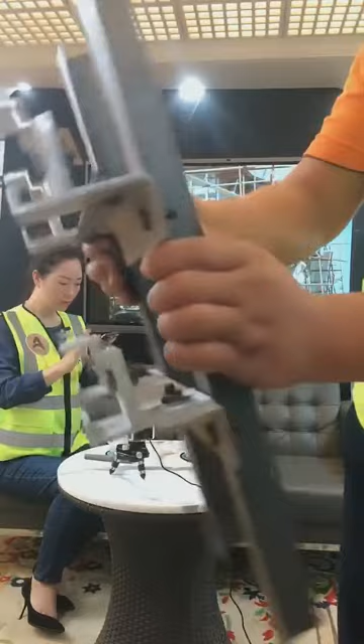Now in China, more and more buildings use the mechanical frame to do the stonework. I think each country has different regulations, but in China, for all the stonework on the facade, I don't think they're using any glue anymore. And even with all kinds of different glue - they call it very strong stone glue - still it's not safe.

For interior it's probably okay, not so high - because of the height of each floor, in the bathroom, or with porcelain, because porcelain is very thin and light. But for stone it's usually heavy, especially for this house, this palace. Better we continue with this palace - okay, please, next step.

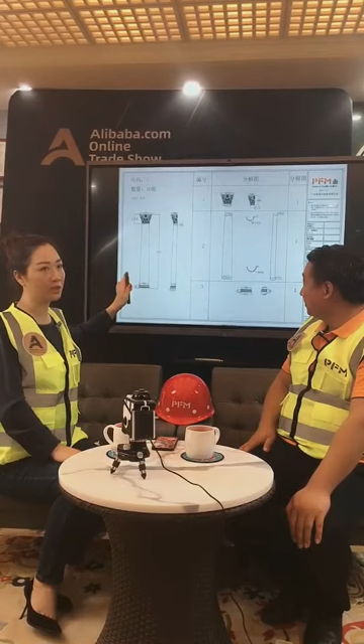Oh sorry, it's here. The next step, like what we said before, is it's not easy - if you have a wall, you have a design, but in production you need to separate each piece, right? We are explaining the two big columns, how it's being done. The height of the column is 4 meters - one piece, wow, that's a big one, that requires a lot of material. But I think they're separated, they need to be separated into two or three pieces.

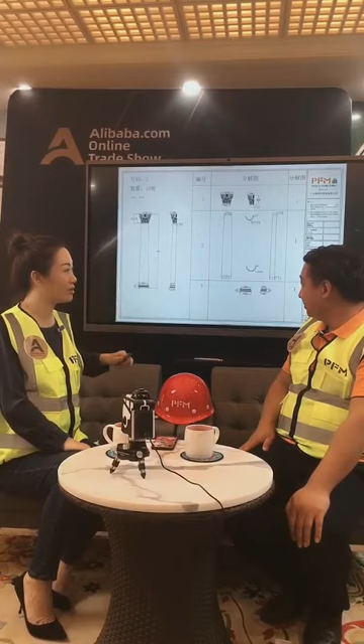Okay, that's overall height, that's the capital size. That's the hollowed one, from there you can see. Oh, okay, no light. From here you can see there is a base column, capital column, and a body column.

This is our engineering drawing just for this column, and this drawing is for our factory to produce this - for production. As well, this is for installation, but also we will mark, sometimes we have to mark each column, so on the job site they find the location of this column.

To clamp the stone. Another point - this system is safe for the earthquake. Yes, of course, because it's a steel structure, when the earth moved, it will be safe. Yes, it's a good point.

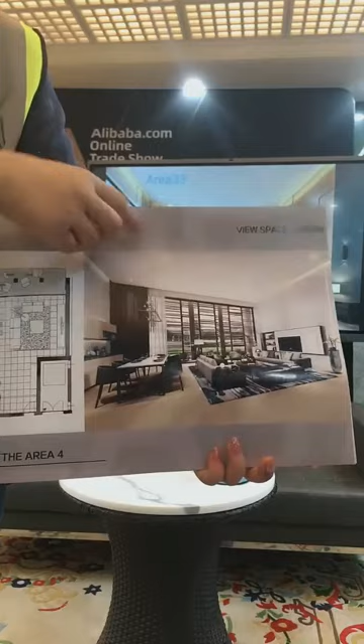And here's the detail of the TV wall. Here is another detail of another wall. Yes, another room, another bedroom.

This is a small detail of the wall design. There is wood, there is stainless steel. It's a very modern design. This is the idea of the house, modern design. This is a bedroom.

This is the bedroom, and there is a very special glass, and also a modern lighting chandelier. The wall is using a very special seaweed mud, and also a special healthy painting. Okay, here's the marble, marble on the wall. Hidden lights are popular.

Here's the character of the wall. You don't see it very clearly, but it looks like a galaxy. And there's decorations. Come closer. Here is a decoration, a feature of the painting. It looks like a galaxy, going around.

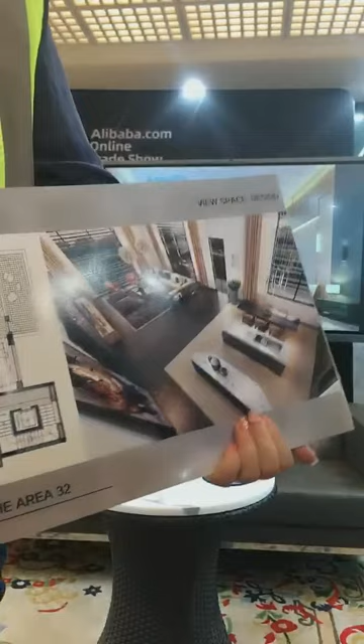This is another one. This is a kitchen and a living room. There is a dry area and a wet area. Here's a wet area, and we used a porcelain floor. Here is the dry area, we use a wood parquet floor. Very nice.

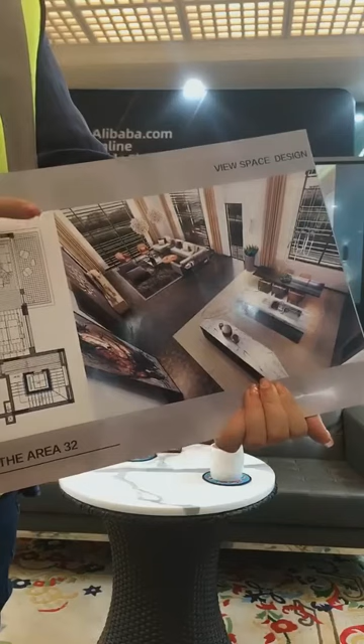Because you could imagine here you will wash the dishes, you will have tea here, the water could come to the floor, and long time after this will be damaged, right? So we use parquet in the sitting area, but only in this area. This is not a heavy kitchen, this is a Western kitchen, we call it only a light kitchen. Light kitchen means that you have tea here, you wash some teacups here, simple things. In this palace, there's a very heavy kitchen in the basement, in the parking, next to the parking.

Okay, so this floor is finished. This is some bedroom, and this is another bedroom. This is a very special wall design.

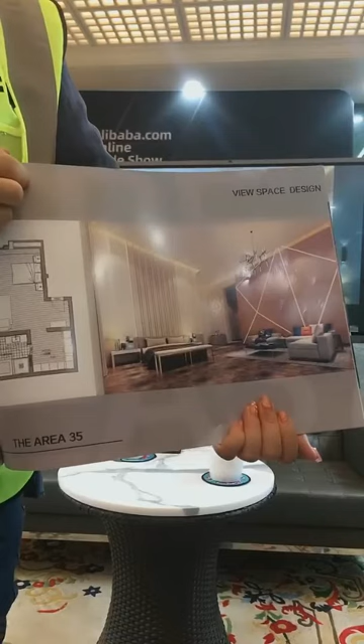The wall is 3D, it's coming a little bit away from the wall, there is some distance, so this is a high point. This is LED light. It's a nice design and very hard for construction, but we did it. We have very good carpentry.

We'll show some photos. This is also as well. This is a very high wall. The madame of this house likes a Chanel design, French, very simple Chanel or Dior design, but still in a modern look. So we came to this design. There is some hidden light here.

Now this is the details of this wall. We're gonna show you some photos. I was at the job site. Okay, that's the idea.

We will not show you everything anymore, but we offered this design to our customer, and they were very happy with it. And then we gave a budget, which I think was a very good price for them, and we took the job.

It started in 2018, I think, in August or October. With our workers, they went to the site and started the whole job. By now we have finished only the guest house area. So let's look.

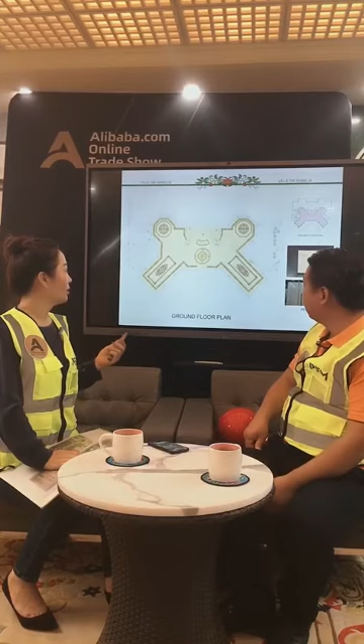Okay, so this is our interior design - it's clearer now. This is our designer. We did a floor plan for them with the medallions. It's 2D, not 3D. Then on the left you see the location.

It belongs to the ground floor. The material you chose is cream marfil - yes, a little bit over there, you see it. Then you see a small sample, and you see a big slab showing how it looks.

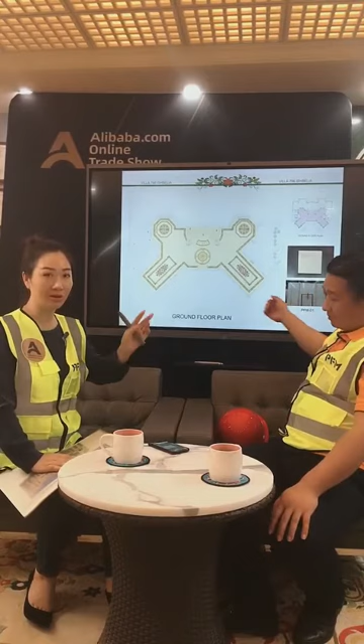The design is exactly book-matched, left and right. I think this is the majlis - maybe a men's majlis and a ladies' majlis. On the ground floor, it's usually arranged like this.

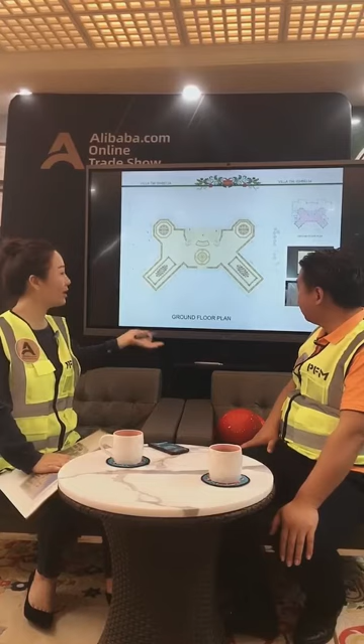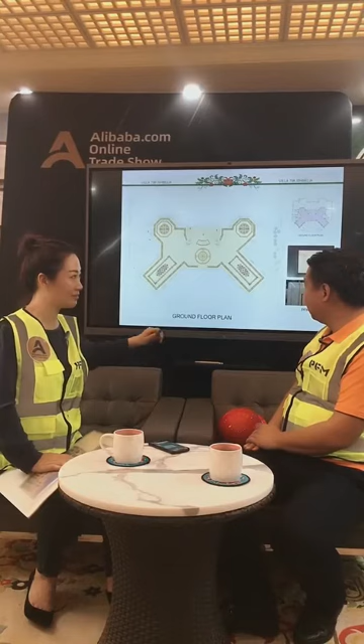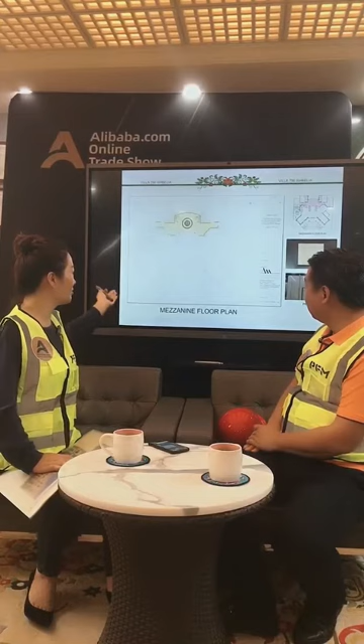And then you come to the middle floor - the Mezzanine floor. In the Middle East, they call it the M floor. So here you can see how we're going to arrange it, though it's not very clear here, so let's move quickly.

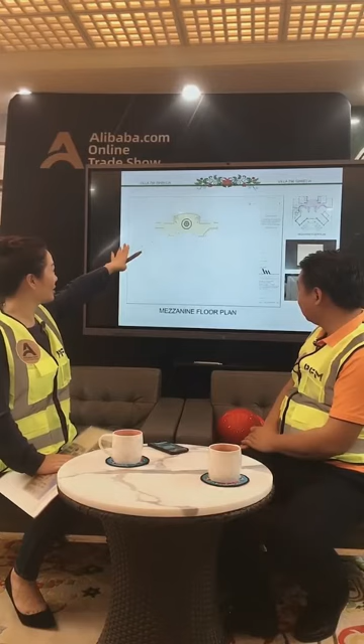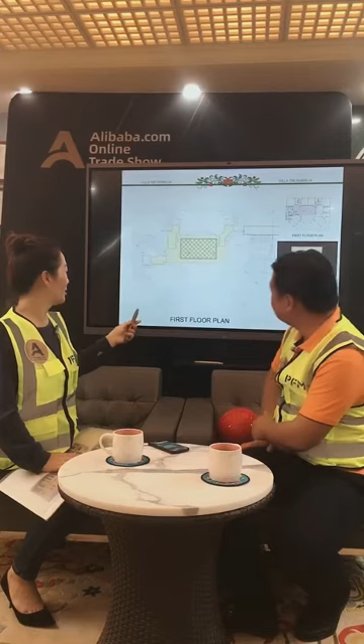And then this is our first floor. There's a problem - I know when the camera points to the TV screen, it's usually not clear, but I do have a printed one. Let me show you.

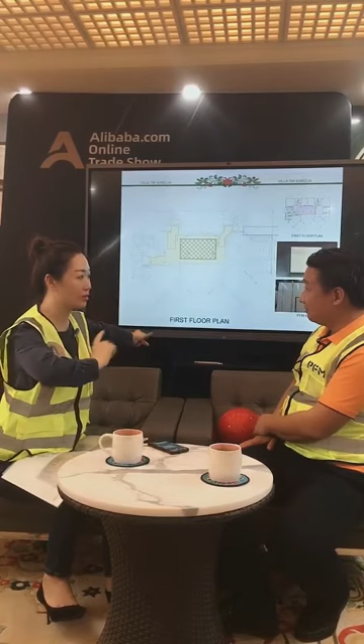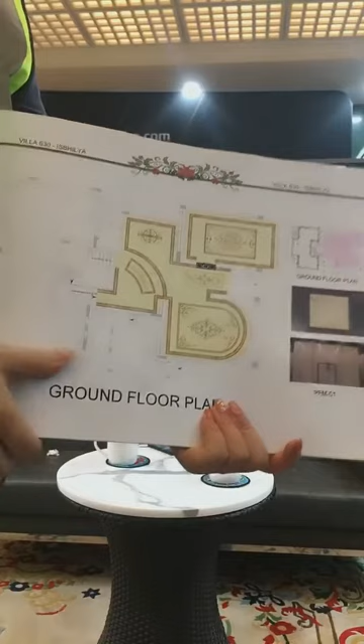Okay, see? Here's a printed one. It says location, ground floor plan. This is the area we worked with - this is the master ground floor plan done with AutoCAD.

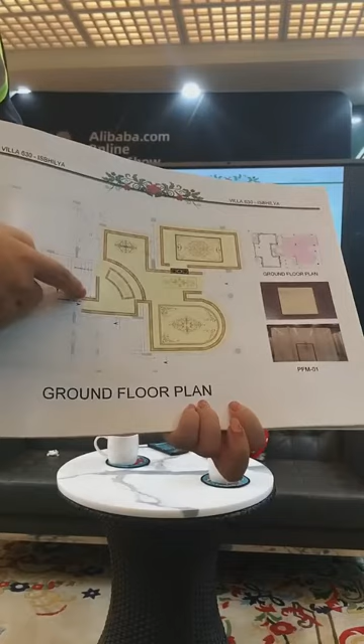You can see the locations, stairs, very clearly - each room and these patterns. Then here you see the location, highlighted in pink. The pink zone is the area we designed - the medallion.

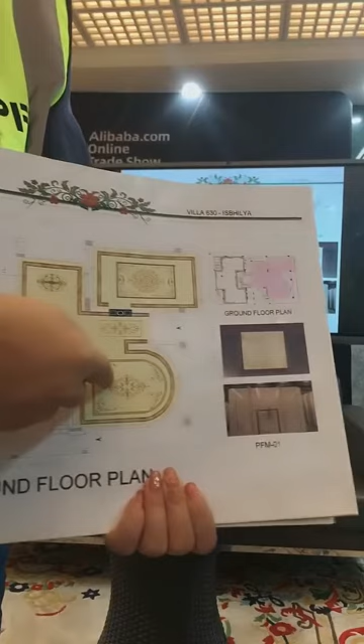And this is the material we used. The enlarged small pieces show it's cream marfil, Spanish Crema Marfil. In the Middle East, people love cream marfil - it's proven to be good material, strong, shiny, long lasting, and the color is beautiful. Still very popular. Then this is the slab, showing the material and the big pattern, how they will look. So this is how we work on each floor.

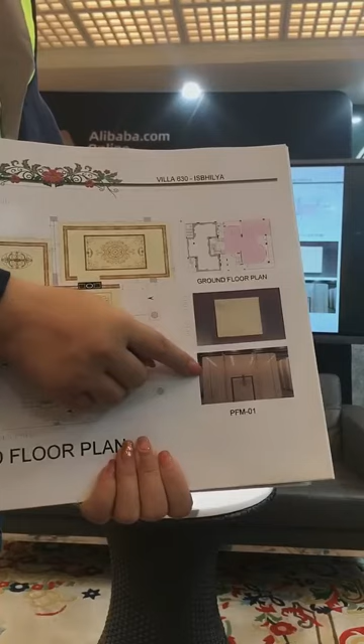Let's go to another page.

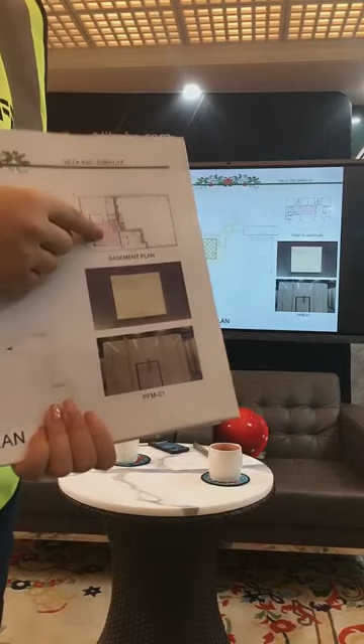This is the basement. Again, you find the location easily. This is the master floor plan for basement. This is the area we're going to design, and then we make it very big because it's limited, if you wanted to show everything in one page, you cannot. It becomes very small, so you can find and enlarge these small pieces. We enlarge this small area and try to explain what we will do for it.

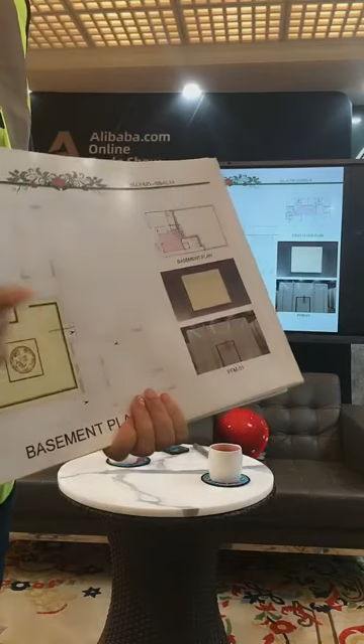Then again we show the material to avoid mistakes. It's a Spanish Crema Marfil, small and big space, the big slab, how it will look like. We are a professional team, so there's no misunderstanding, no mistake. We control each step of the work.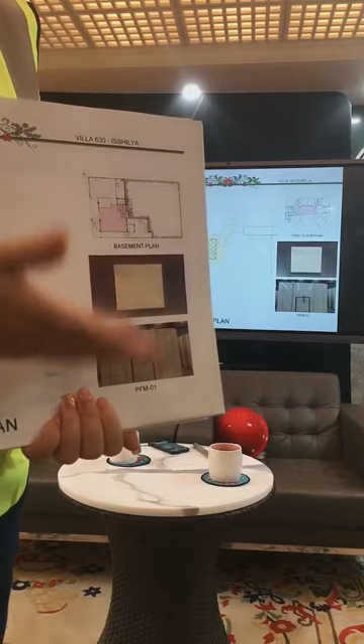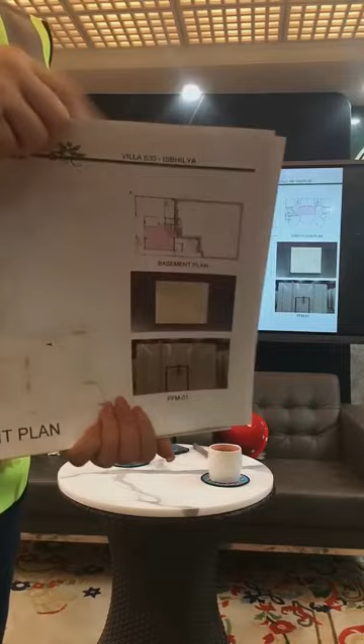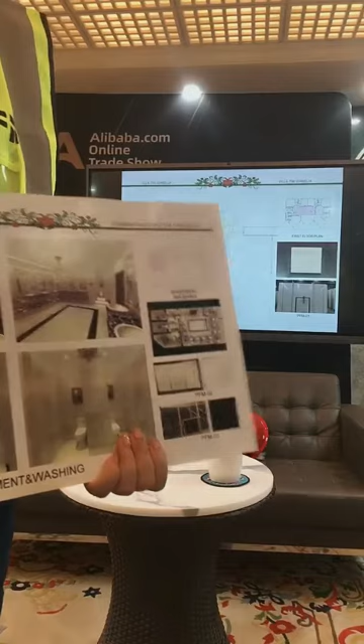There's some bathroom design. Again it shows the location, highlighted here - this is the bathroom we are working on. The highlighted pink area is the location of the bathroom. This is the material we're going to use, and this is a 3D image of how we're going to work with this bathroom on each wall.

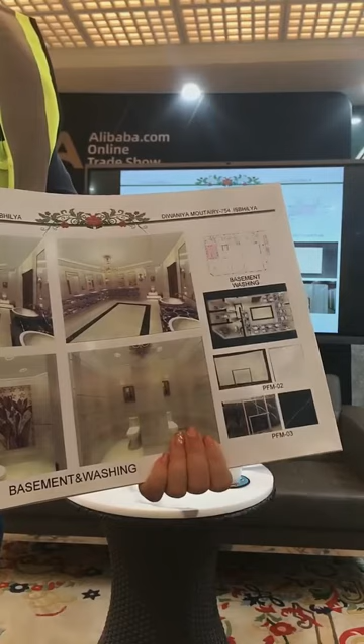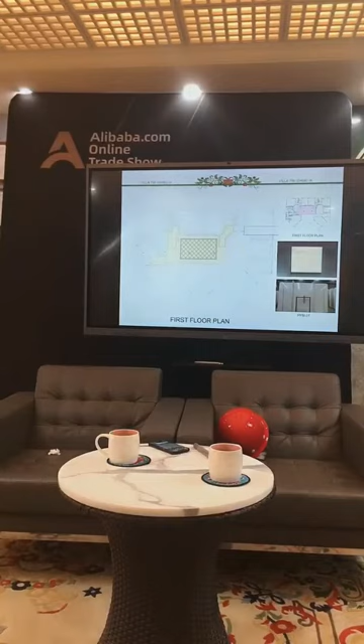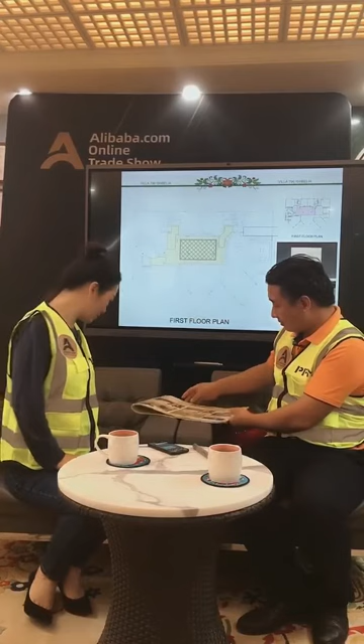A lot of our customers are probably building their home for the first time. Nobody builds homes a lot, right? So this way we try to find the easy way for our customers. Nobody is born to be a designer, nobody builds their home all the time, so we have to find a way for them to understand. We have to speak their language, and their language is mostly photos - pictures are the best, easiest way.

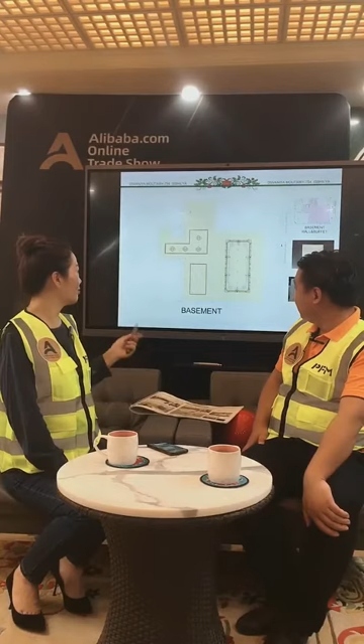Let's see - first floor, basement, beautiful design. Ground floor, basement. By the way, we have a very good designer who makes medallions - one girl who makes very beautiful patterns. Ground floor, this basement washing area - can you see it clearly?

Basement washing - oh wow, agate in the bathroom. Did you see that, behind the toilet? Behind the toilet is very beautiful agate, it brings the energy when you're using the bathroom. And this is tiger eye, also a semi-precious stone.

Okay, let's see - oh, black one, Portoro, right? But Chinese Portoro, not the Italian Portoro. Turkey - oh Turkey, yes, beautiful. But the most important one is the Italian Portoro - beautiful, but very high price. This is an affordable price. Okay, just for Italy - this is Italian, Statuario? Yes, this is Italian.

It's a nice bathroom. And this is black, similar to black Marquina, from Turkey - also from Tunis. There's black with a golden line. Here people don't see it very clearly because it's only black. Okay, this is the bathroom design. Another bathroom we'll go through quickly - gray color, white color, that's it.